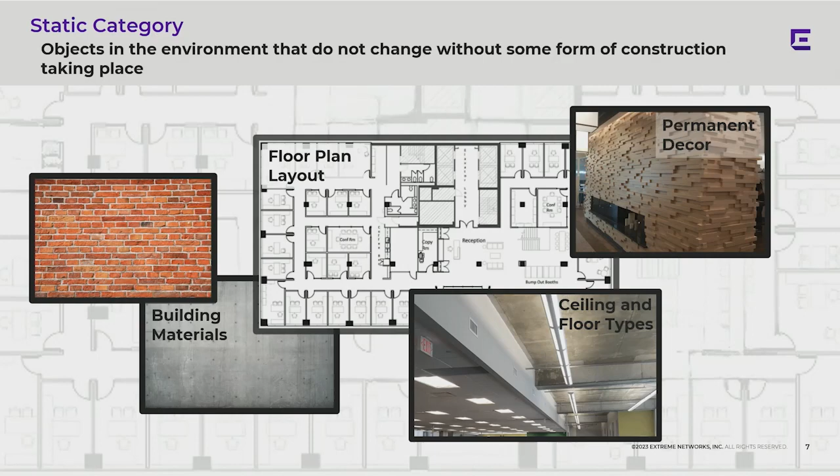The temporary group, this is where things get a little more interesting because these are things that can change very quickly and very easily, but they normally don't change a lot, okay? Decorations, function of a room, things like that. And we've all seen this in education because think about the evolution of the chalkboard to the whiteboard, then smart boards, and now large TV monitors. If the designs for the school is not a one-for-one, this is going to have a major impact on their RF environment and may require a redesign. Okay?

I was at a healthcare facility just recently. A nurse's station would report intermittent performance issues. And when this would happen, they would notice that the clients weren't connecting to the expected primary AP covering this area. What we found was there was a TV on a retractable mount that was able to tilt, and if it was pulled out and tilted so that it was easier to view from the patient's bed, it would impact the signal level and cast an RF shadow. And therefore, the clients would start connecting to other APs.

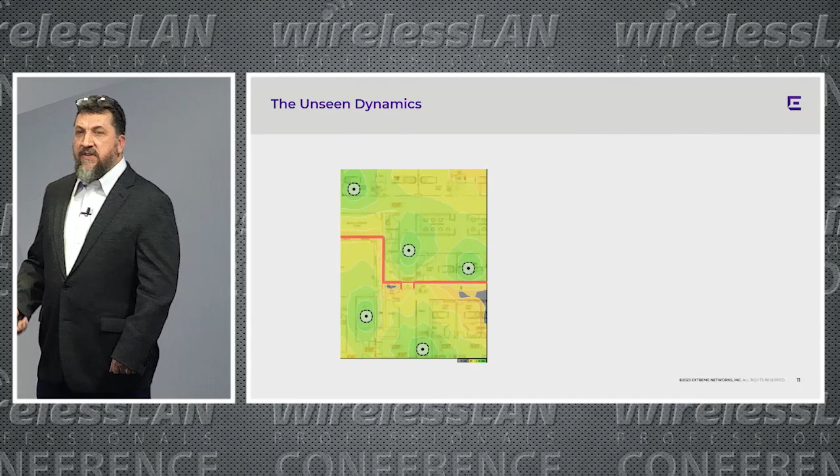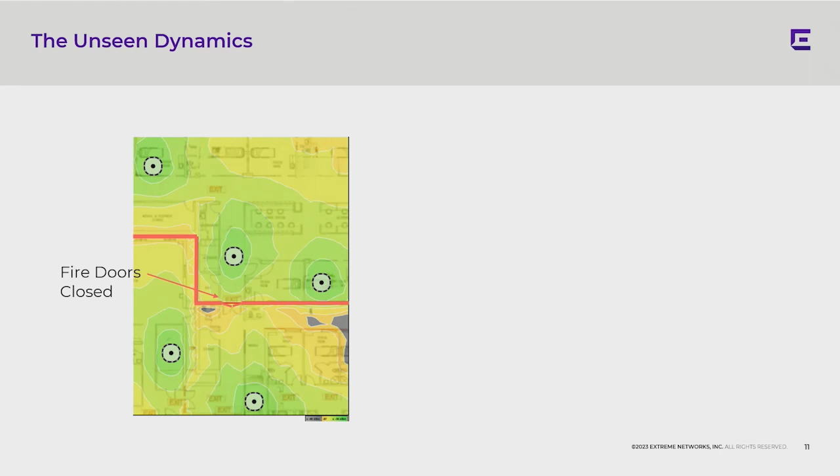Here's an example. This is a predictive design I created. This portion of the building has a firewall running through it and a fire door in the hallway. When we look at this from the coverage from all the APs, with the fire door closed versus that same area with the fire door open, you don't see a significant impact to the RF environment.

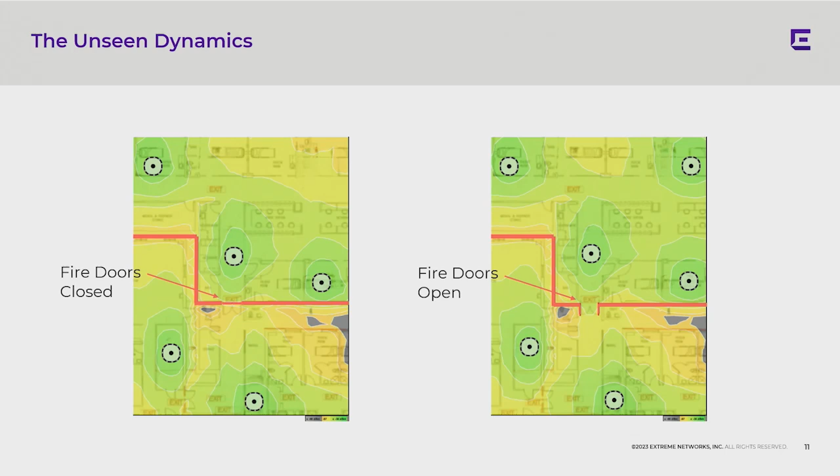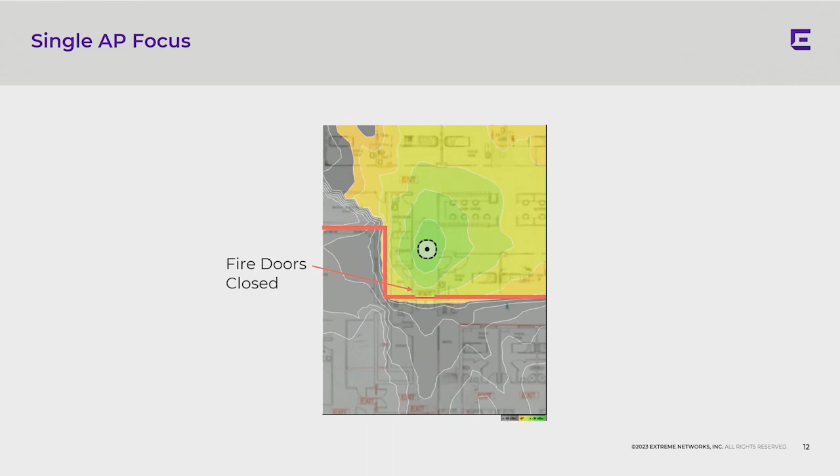But now if we focus down on a single AP, the AP that's mounted by the fire door, and I see this a lot, and I'm not a big fan of this because this creates a high signal at the fire door, which creates a high potential for change. When that door opens up, now we're propagating signal at a very high signal level down that hallway. Okay?

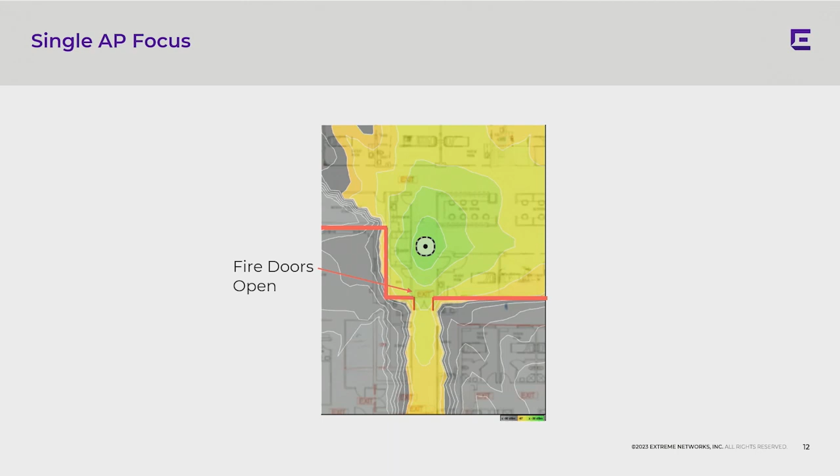Think about what this can cause. Definitely potential increase to CCI, which could lead to capacity issues. Could be connectivity instability in clients on the far side of the door. When that door opens, they may bounce to that AP, and when the door closes, they may bounce back to a different AP. And definitely roaming.

If you think about it, if you're roaming out of that area, you connect to that AP, and as you pass through that fire door and down that hall, your signal level is so high that you may not reach your roaming threshold before the doors close behind you. And if the doors close behind you, well then your signal's going to drop suddenly, and will you roam? Or will you do a hard disconnect and then a reconnect? And how's that going to impact your client?

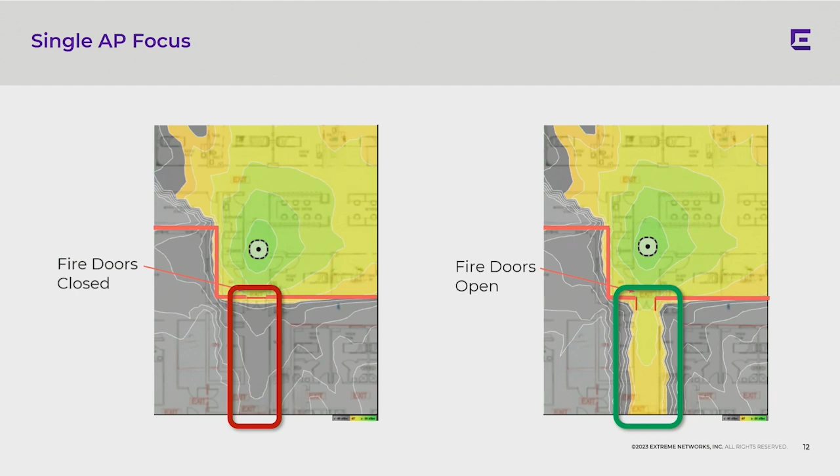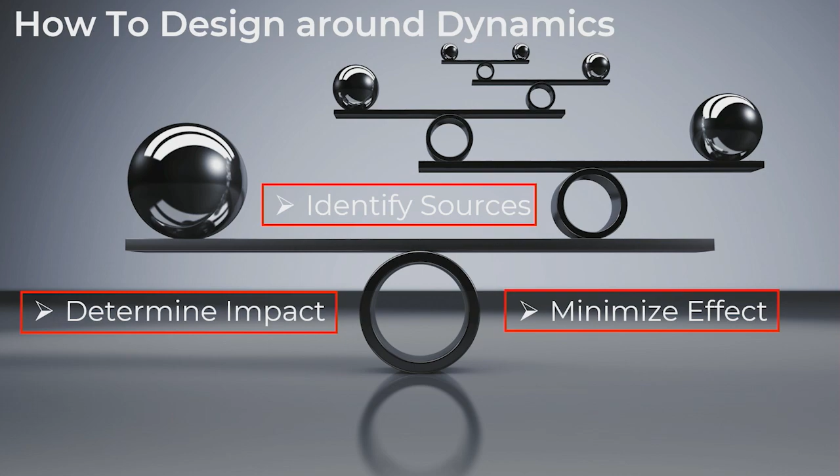So we've identified a source. We've determined it does have an impact. How do we minimize this? I do this through micro adjustments to my mounting locations. Now in this example, when I look at this, I see two problems. The first problem I see is that there's direct line of sight through the fire door.

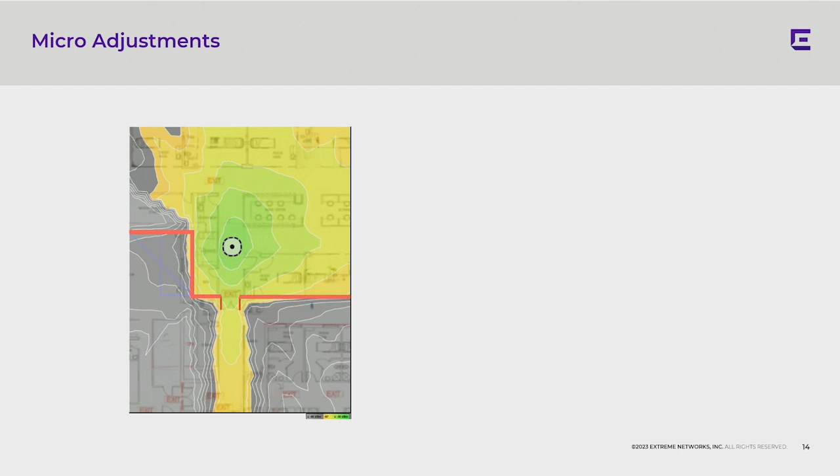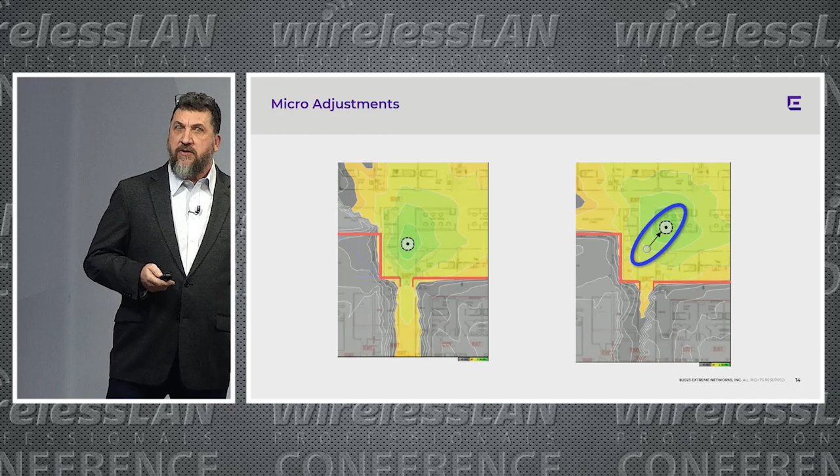The second problem I see is that there is high signal level at the source of change, which is the doors. Okay? By simply moving that AP back and to the right, we're using the building for isolation. We've lowered the signal level at the doors, and we've removed line of sight. We haven't dramatically impacted the coverage area. We're still within our requirements.

And now if you look at that, we've definitely reduced the potential for CCI. We've definitely improved our stability when that door transitions. And now if you roam out of that area, you're going to reach your roaming threshold before those doors close behind you. So we've improved roaming.

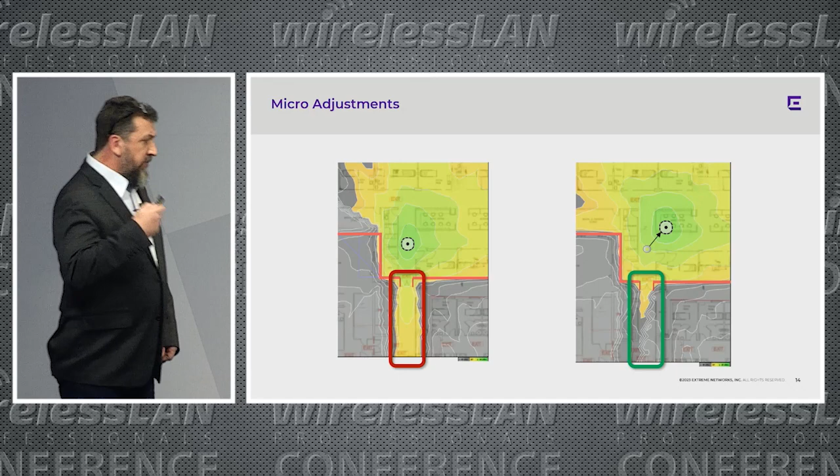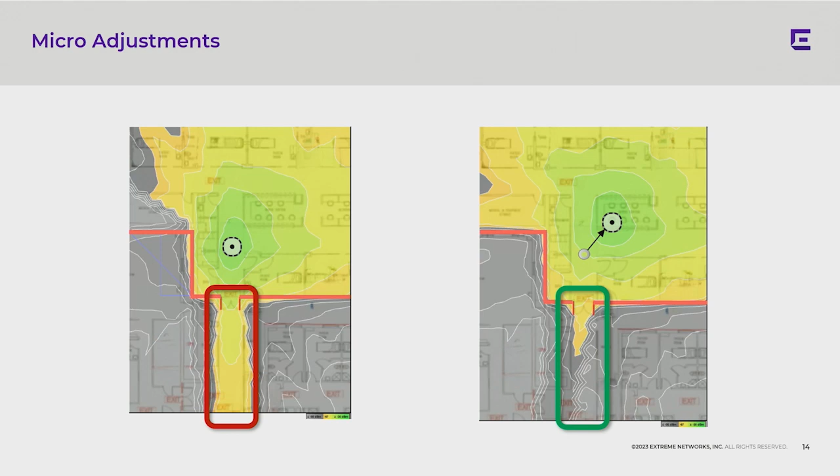Okay? Now, a lot of people will say to me, well, that's a fire door. That's a big, heavy door and a lot of attenuation. That's going to have an impact. Regular doors won't do that. This is a predictive design I did in Hamina, and I based this on real-world data, just like the last one. And this shows an in-room AP design in a section of a building. Now, this repeats multiple times in this section of the building.

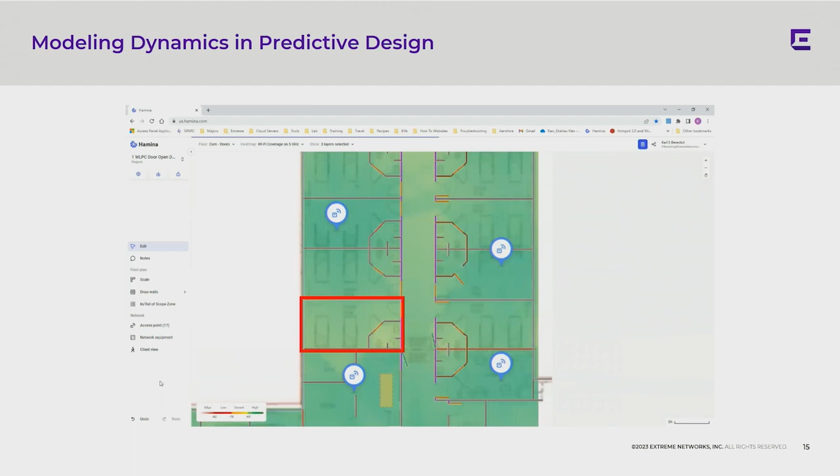Now, what I do with this is I'll draw in doors, and then I'll move the doors within the predictive design, and I'll use the undo and redo button to animate those doors to see what the impact is. So I've got a video, and in this video, we are going to focus on the room that's going to be highlighted in red. Its primary AP is being covered by the AP above it. Okay, the AP below it is blocked by a firewall.

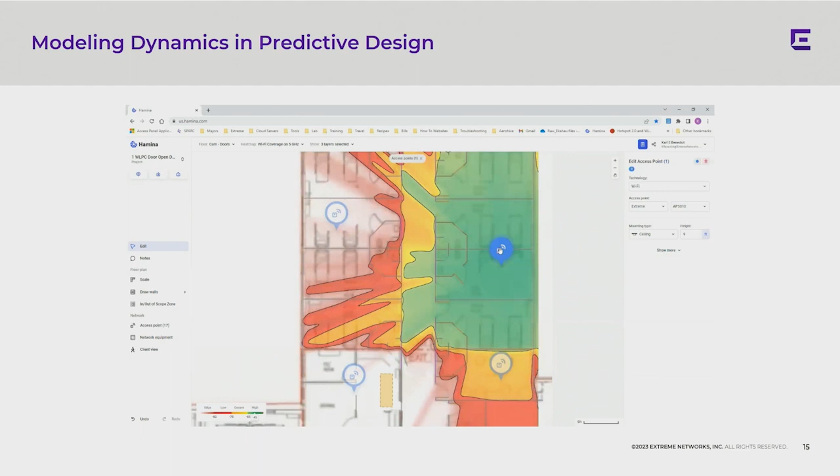Now, the AP across the hall, with the doors in their most blocking position, and that doesn't mean closed, because two doors are closed and then the bathroom door is open. Okay? The signal's not propagating into that room. But when I start to hit the undo button, open the first room door, open the second room door, and then close that bathroom door, you'll see that we have a signal level propagating into that room at a negative 55. That's equal to the signal from the primary AP.

Is that going to cause a problem? Potentially. Depends on the client, depends on what they're doing, depends on what else is happening in the environment. But what I can tell you is that you've increased your potential for an issue. And with this happening multiple times throughout this floor plan and these doors transitioning, you've now created a very unstable environment.

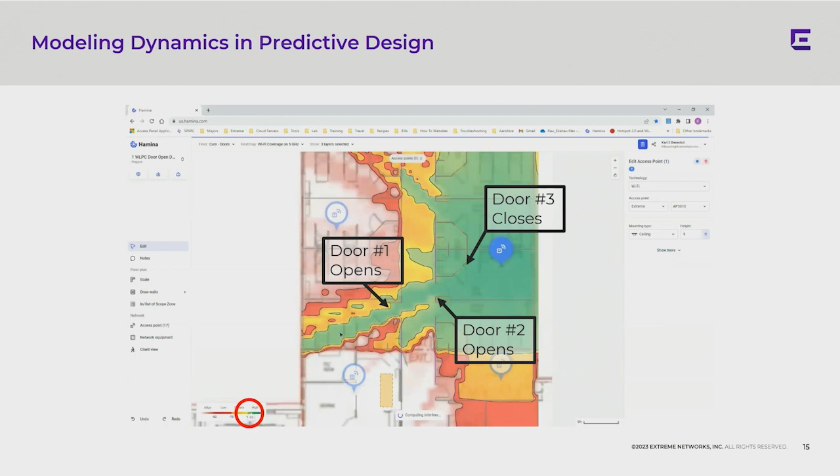I compare it to a road with a lot of potholes in it. A smooth road versus a pothole road, you're not going to affect the performance of the car, but you are going to increase your potential for a problem or an accident. Now, in this situation, how do we minimize this effect? I would do the same thing. I would do micro adjustments to the mounting locations and remove line of sight through the doors.

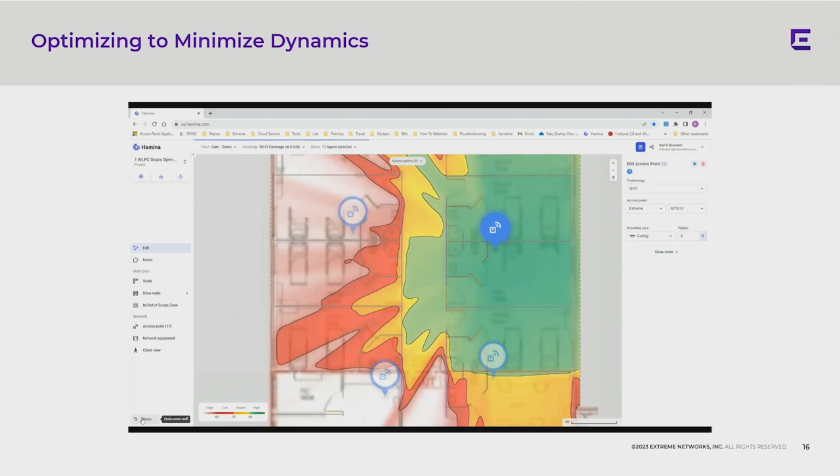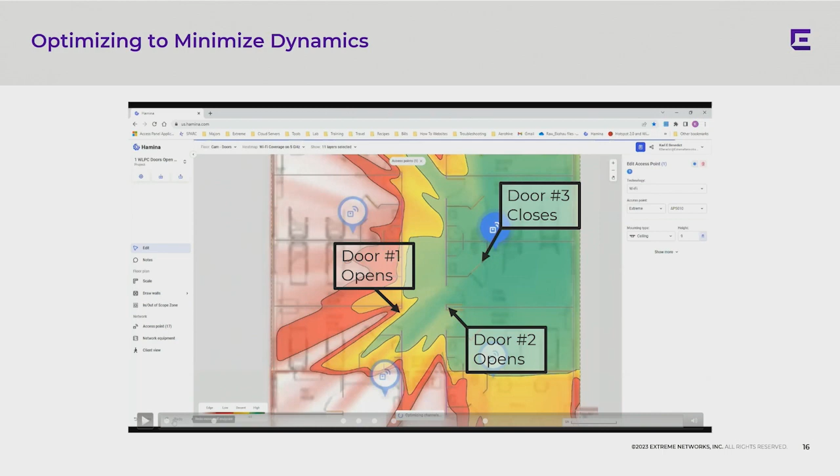By moving the APs from the center of the rooms up into the corner, we're not impacting coverage. Coverage is still adequate. And you'll see that when these doors transition, the impact to the RF environment has been minimized. And we've increased RF stability. This, to me, is something that we can't eliminate. We can increase RF stability, and we can preserve our RF environment for performance, okay?

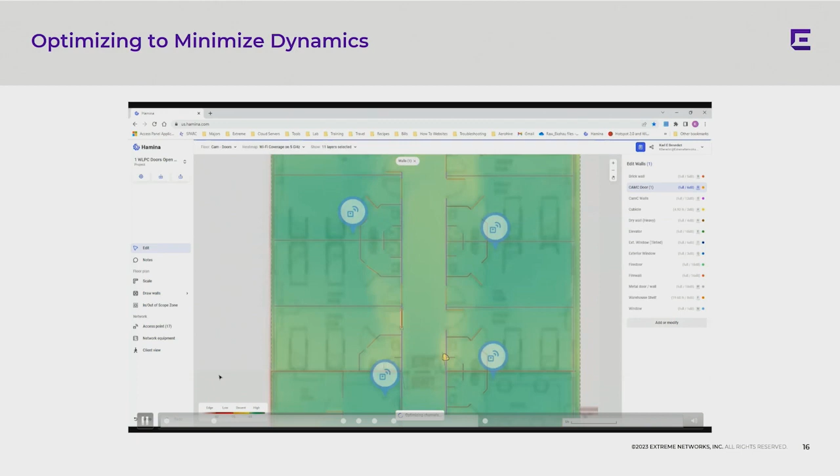I'm going to play the rest of this video, and it just shows how I move the doors around and I use the undo and the redo button to animate this. But it can be done with anything. Attenuation areas made to simulate people, doors, any kind of movement in the physical environment.

So I'm going to leave you with the final thought, and that is, as requirements get stricter, as we start to use higher frequencies, because higher frequencies are going to be more impacted by movement in the physical environment, RF stability, in my opinion, is going to become as important as things like coverage, capacity, and good roaming environment. If we can increase RF stability, we're going to preserve our RF environment to better support the performance we're designing into our networks.